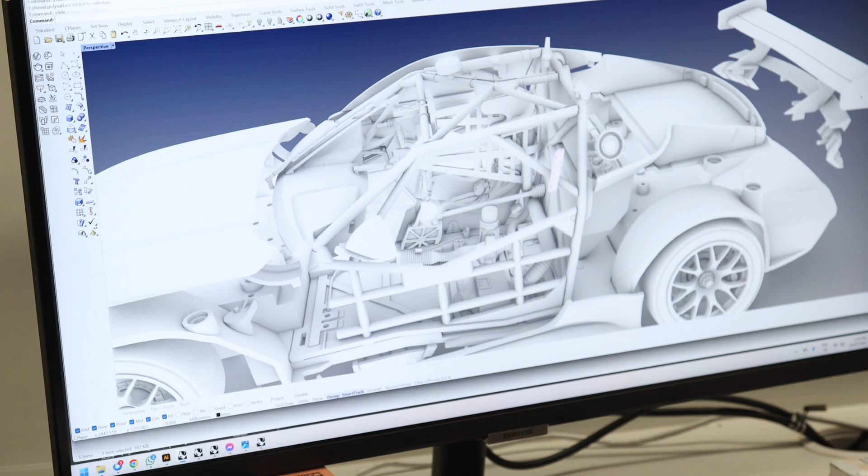So maybe, Greg, being our R&D man, you could talk us through how we begin the process of getting to the point where we sit here today with actual models in front of us. Yeah, all right. So let's start at the beginning. We obviously don't make these out of nothing. When we actually start a process for making a car, there's generally two ways to do it. One is to 3D scan a car, but with a lot of modern stuff, and especially in terms of supercar land, somebody's already done a lot of the CAD work to create the real car, and at a certain point we pinch that, effectively modelize the data.

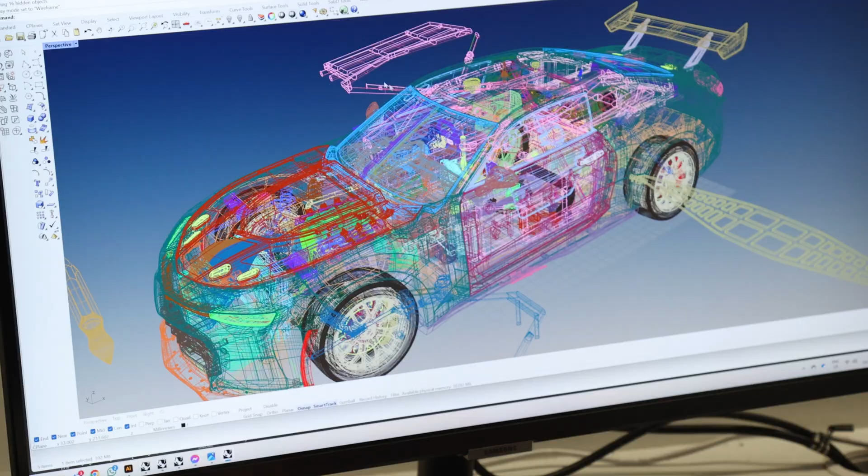So if you're talking about a real race car 3D model, you might have upwards of 12,000 parts, and that includes nuts, bolts, washers, screws, everything in there. We can't necessarily do down to that level of detail. We still need to be able to get it out of a mold. We still need to be able to produce it. So we have to kind of simplify certain things, but ultimately the external shape is exactly the same as the race car. Are you suggesting that there aren't gears in our transaxles?

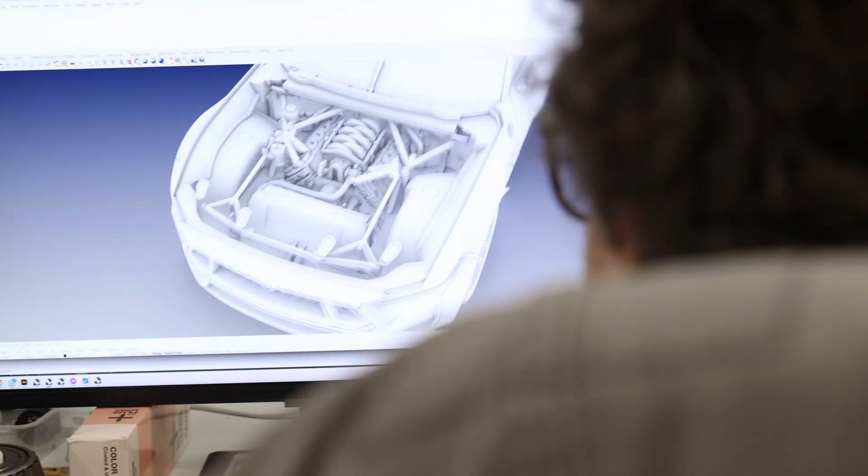No, there are no gears in the transaxle. You can't start it. And not unless you're 1/18 scale, you can't get in and drive it. They're a static model at the end of the day. They're meant to look good, but you can't race them. So I guess from that point of view, we get the 3D data from teams and or manufacturers. It's a little bit depending on which brand we're talking about, where we get data and information from.

The beauty, I guess, with Gen 3 is that because there are so many standardized components now, they are practically identical, every car in the field. Yeah. It's actually made that part of it a little bit easier for us, hasn't it? Yeah, in the past, it's been a bit of an issue where different teams will do different setups internally, especially. So things will move around, people will put stuff wherever they like. Gen 3 was very, very standardised, to the point where, if you recall, SVG got in trouble because they shifted the core box around.

It's very much fixed in stone, so that makes our lives a lot easier in that we can pretty well guarantee where stuff's going to live inside the car, and when we model it, it's pretty well right to the actual vehicle. And we'll cover it off a little bit later when we compare the two models, but with the older cars, with Erebus and their E-Cell seat, that was a pretty big thing for them, the technology that they'd gone into with that, and that's something they wanted specifically replicated in their models. Which we did. Yeah. So two sets of different seats depending not even on what brand of car, but which team. So it got really down into the weeds in that regard.

Yeah, that adds a level of complexity, and the more complexity you add, it just increases the chance for stuff-ups. But generally, we got it right. It just makes things a little bit harder when you've got two sets of seats. If you've got different interior parts, that just makes it a little bit more difficult. At least with these, everything is the same pretty well across the board, and pretty well across the board in terms of Chev and Ford. Internally, they're almost exactly the same.

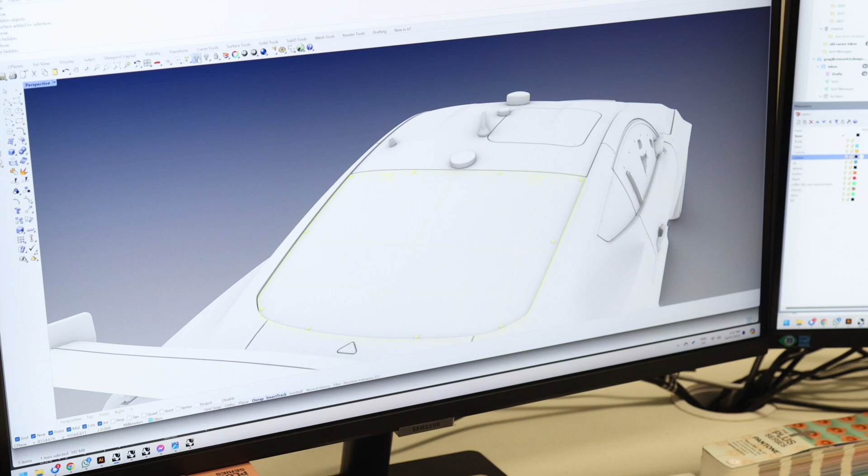All right, so we go from grabbing our data from team or manufacturer land. We then modelize it, take it down to 1/18 scale, modify hinges and all the sort of bits and gubbins and things that we need to change. Yeah. They just simply can't be exactly the same as the real car. No, and mounting points and things might be, but hinges and things will be just far too flimsy.

Yeah, so if you think about it in a realistic sense, these cars are effectively 5% of the size of the real car. So if we scaled everything down to that point, you'd be dealing with hinges that are probably like 1/10 of a millimetre wide. That just wouldn't last. Bit small. And ultimately, the cars still need to be handleable, so they end up a bit beefier than what you'd expect. But they do actually have to be strong enough to withstand transit, strong enough to withstand handling, and maybe the occasional 3-year-old throwing them around the room, as we all know kids love to do.

Correct. So yeah, hinges is probably the biggest thing, where we do need to make them beefy enough and function well enough that the cars will stay together, panel lines stay where they should. And that's a big part of getting the opening parts of a die-cast model correct.

The one other thing with Gen 3 that in everything you've just said has proven to be a bit of a challenge is the rear wing. Yep. Because compared to previous generations of supercar right back really, the wing mounts have been pretty beefy in most cases. Yeah. Maybe the VE was similar, but the VE was at least still a solid piece of alley, whereas now they're not solid pieces of alley. They've got big holes in the middle of them. Yeah, they're getting smaller and smaller, and that's an aero thing more than anything else.

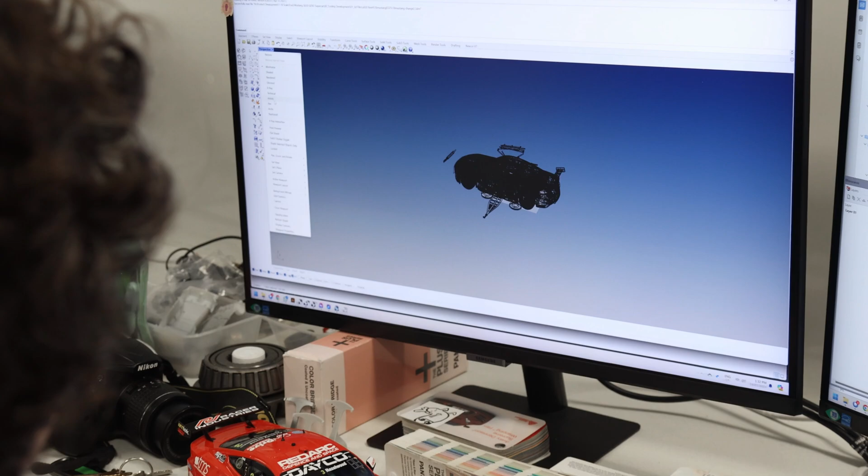So yeah, there'll be things in there that you'll look at and just go, nah, we're not doing that. That looks dumb. Go and retweak it. Either make it bigger, smaller, fatter, skinnier, whatever you need to do to make it work. And that's something you really only can do once you've actually got a physical object in your hand.

And the other thing is too, because we've done these two projects at the same time, effectively, you're sort of staring at the same thing twice. That's where you can miss something on one thing and not on the other. When you're concentrating on one project, I guess it's pretty easy to just follow that through. Yeah, your focus is entirely on that car, but we're actually trying to do two simultaneously. When they both look the same. Yeah. It gets a bit more difficult. Yeah, you can run into a few issues with that, but ultimately it's not as bad an issue as you'd think it'd be. And of course, the process that we're talking about here today is 1/18th land.

But at the same time as you've been doing 1/18th land, you've also been doing 64th land, 43rd, and the 12th as well. And they all have their own issues as well. Obviously, as you scale a model down, suddenly things don't work the way they did in an 18th as a 64th. The construction is entirely different, so you need to keep swapping hats in order to get stuff out as quickly as you possibly can. And then in 1/12th, number one, you're going to a bigger scale, so in theory you can see more of the detail. But then it's resin as well, so that has its own set of challenges that a die cast doesn't, and vice versa.

Yeah. But you've really got to make sure the right hat's on the right foot, so to speak. And it's not as simple as, oh, I'll just take an 18th and just scale it up. It doesn't work that way. You'll end up with something that looks super chunky. So effectively, each scale will start from scratch. You'll take the data from the team and then make it whatever that scale needs to be. So there's not a lot of crossover between the different scales, short of the actual outside shape, what it looks like at the end of the day.